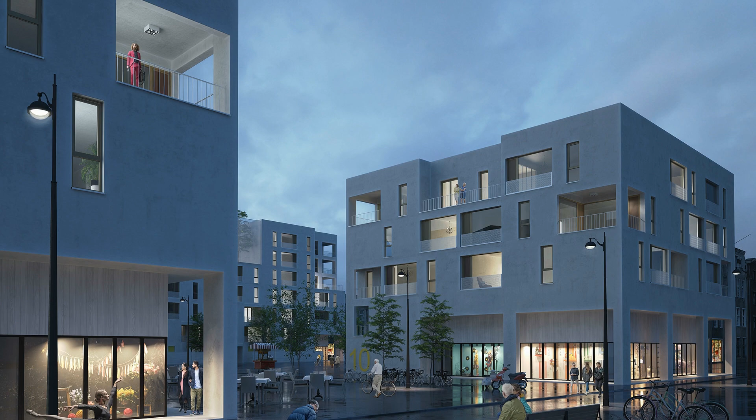With the development of technology and the ever-growing pace of living, it is becoming increasingly difficult to predict how everyday life will be in the future.

Significant numbers of young people now work from home. Many order food instead of cooking. Families don't gather in the living room because everybody has their own private screens at hand. It is pretty common for our daily routines to change instantly, with unexpected overnight guests, seasonal shifts, or large family celebrations.

Difference and variation have become key attributes of contemporary dwelling scenarios. This means that housing should move away from functional determinism towards polyvalence. Instead of deciding fixed uses for each room, which preconditions only one way of living, this project offers multiple possibilities. The apartments are open for individual interpretations and highly responsive to short or long-term changes in everyday life.

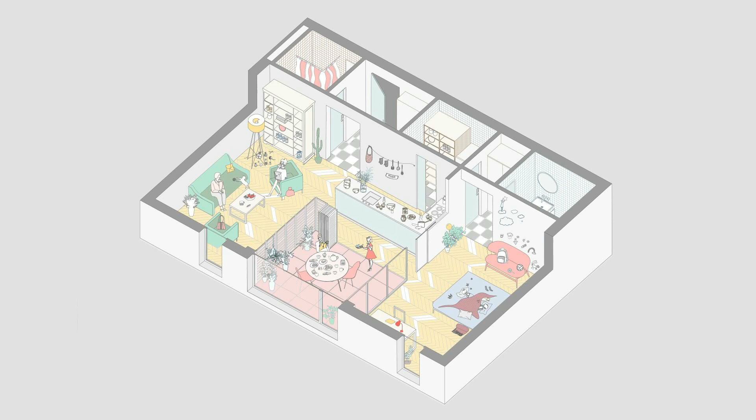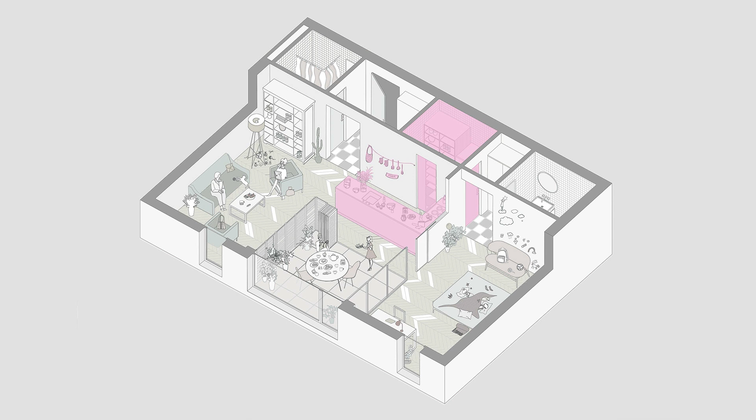All apartments consist of free spaces for daily activities and a compact service belt for sanitary functions, storage, and home appliances. In this way, everyday life is liberated from clutter and noisy machines. Cooking area belongs to the free space of the apartment, while freezers and storage cupboards are located in a hidden, walk-through storage space. Corridors are reduced to a minimum in favor of usable space.

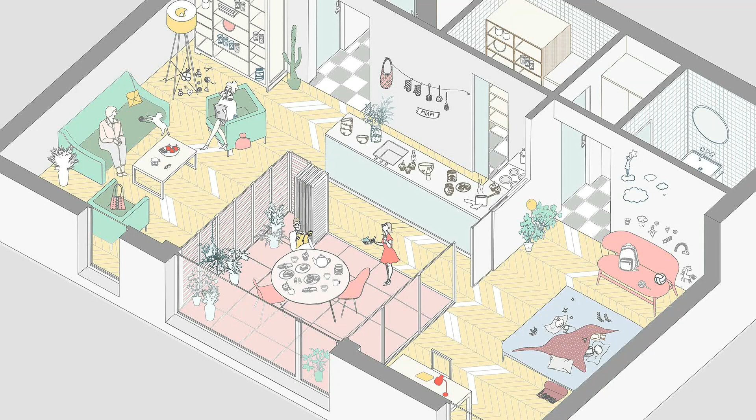To obtain simple polyvalence of each dwelling unit, we introduce a glazed loggia in the size of an entire room, located at the center of the apartment. Instead of solid walls, it is enclosed with light, portable partitions, and faces two or more different rooms, which means it can either serve as an extension of each of these or as a joining space between them when completely open. Additionally, the loggia can be transformed into a separate room when needed.

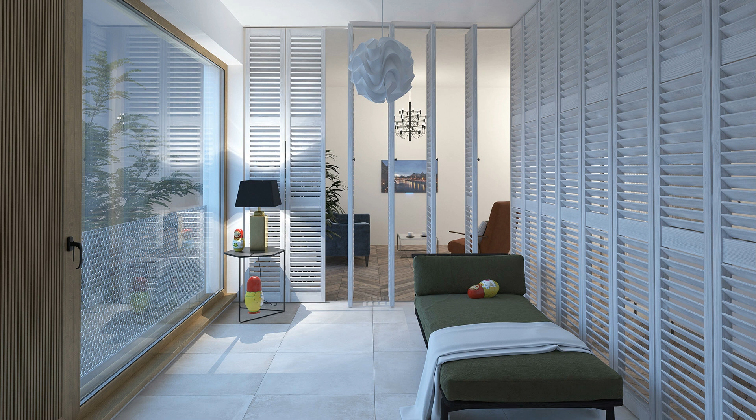Each apartment can be easily adjusted to suit a multiplicity of different scenarios. We believe that space itself is a luxury, which is why we ensure the possibility to perceive the entire apartment as one open space, instead of dividing it into individual rooms.

In polyvalent apartments, one can never really tell where one space ends and the other begins, and various family life scenarios are constantly intertwining. Circular paths are achieved around the apartment, which makes all areas very accessible and easy to maintain. Large glazed openings of the loggia introduce fresh air and lots of daylight deep into the space,

making this the brightest and most aerated spot of the apartment. In winter, the loggia is slightly cooler than the rest of the heated space, which makes it suitable for winter gardens or home gyms. Flexible partitions ensure that fresh air inlet, daylight intensity, and excessive heat can be easily adjustable within all the adjoining spaces.

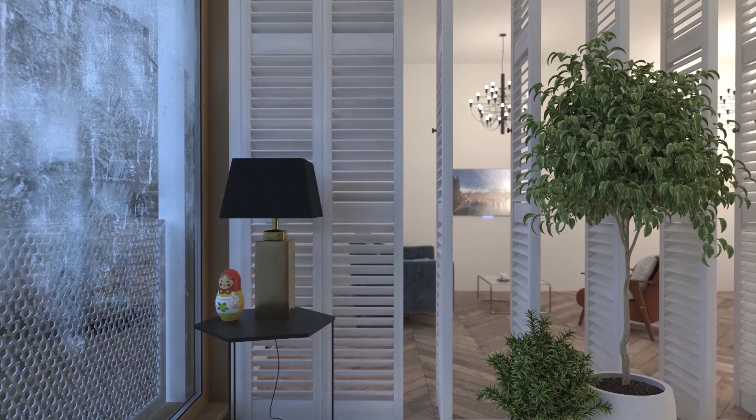By adjusting the shutters, some areas receive more daylight, while some can remain darker and more intimate. All year round, the loggia serves as a buffer zone for outside city noise, fierce weather, and pollution.

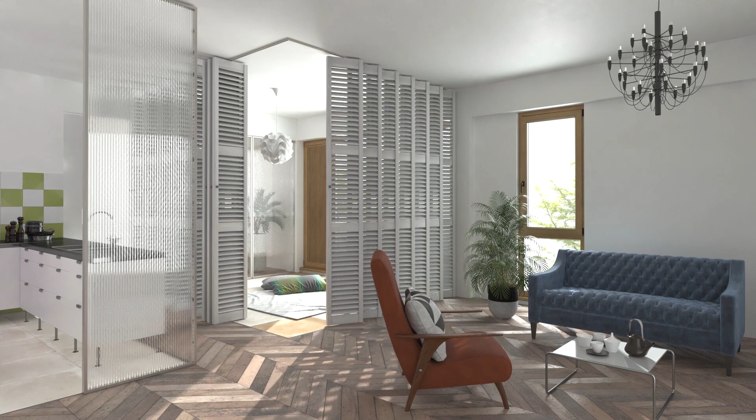In comparison to standard apartments with solid wall divisions and same-size windows, polyvalent apartments are significantly brighter. White shutters and the omitting of solid walls enables daylight to disperse and spread freely throughout the whole apartment. This means that entrance areas, even though located far from the windows, are flooded with daylight.

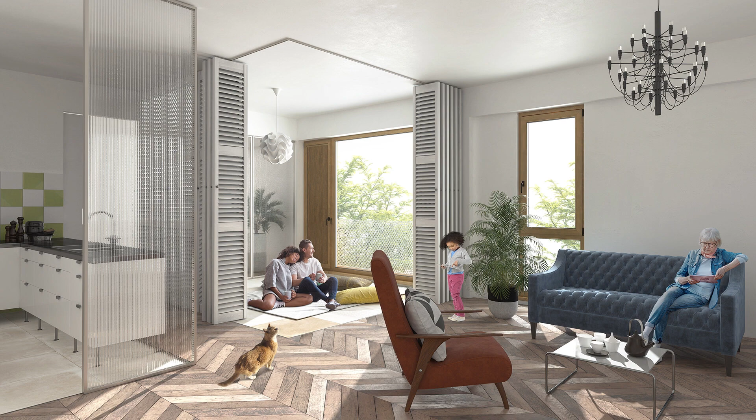This housing strategy allows for a variety of options to be considered when buying an apartment. Depending on the number of residents, their daily lives and economic status, one can choose from 3 different types of lodges, A, B, or C, within 5 standard sizes of apartments. Any type of polyvalent apartment can house several different sizes and types of residential groups.

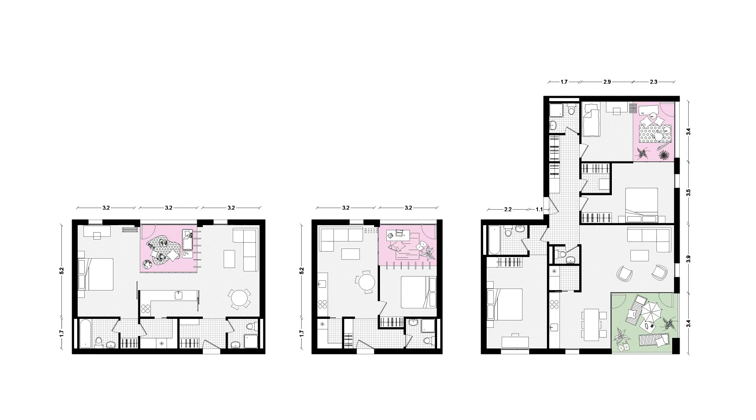Lodges A and B differ in relation to the number of rooms they are joined to and to the size of the entire apartment. Lodge C is open to air, allowing for largest apartments and big families to have their own private garden within the living area.

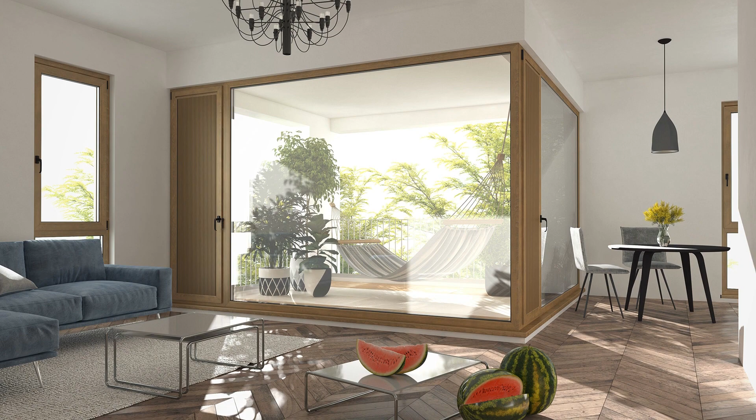Each apartment is composed of modules 3.5 by 7 meters in size, which makes the whole building system very flexible for various apartment combinations and building typologies. Modular composition results in a simple structural grid with maximum spans of 7 meters, which allows for the construction system to be in prefabricated reinforced concrete for all building types.

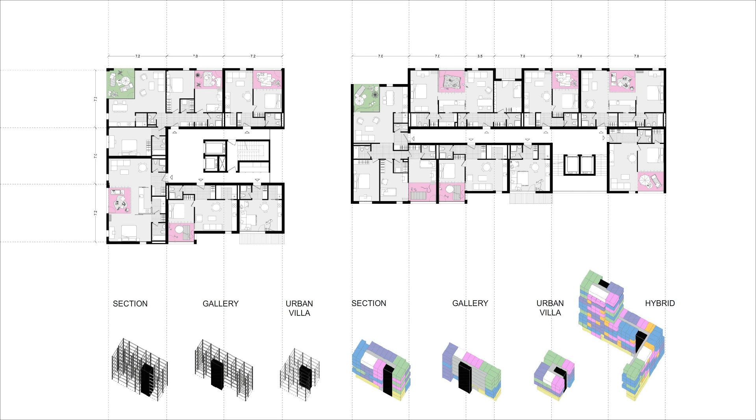Modular apartments allow for a simplified facade system. Various combinations of 5 standardized types of facade elements give the building appearance its diversity, while at the same time simplify and reduce costs for the construction process.

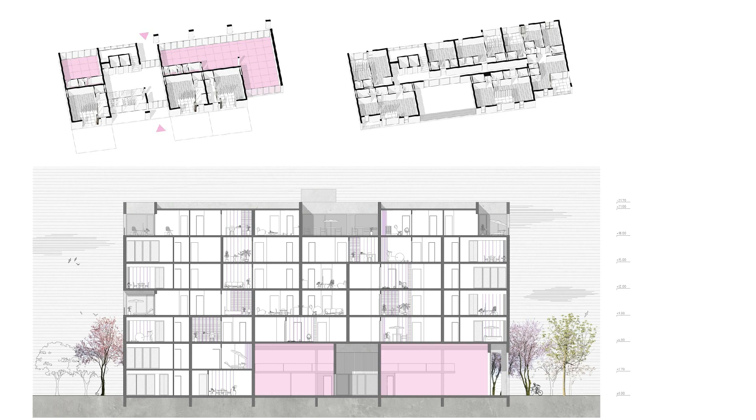Collective spaces for the residents are located on the ground floor, within the entrance area, and on the roof of the building, open to air and to the sky. Ground floors are semi-residential, combining retail areas and garden apartments in a variety of scenarios. In garden apartments, lodges extend towards the front yard, whereas on the last floor they can become open-air patios with private view to the sky.

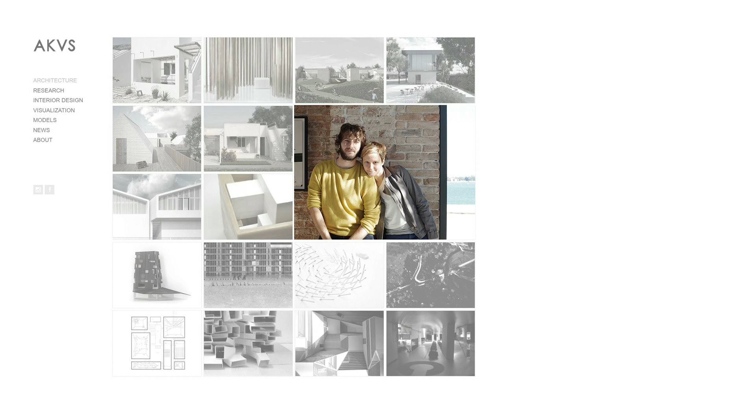AKVS Architecture is a multiply awarded architectural studio based in Belgrade, Serbia. Their research and designs are focused on atmospheric spatial systems that offer multiplicities of experiences for its users. The studio's work is tightly connected to computational simulations, visualizations, and animations as key tools for investigating the spaces they design.

They are currently working on a project for the Serbian embassy in Canberra, Australia, following the first prize award they won on a national competition earlier this year.